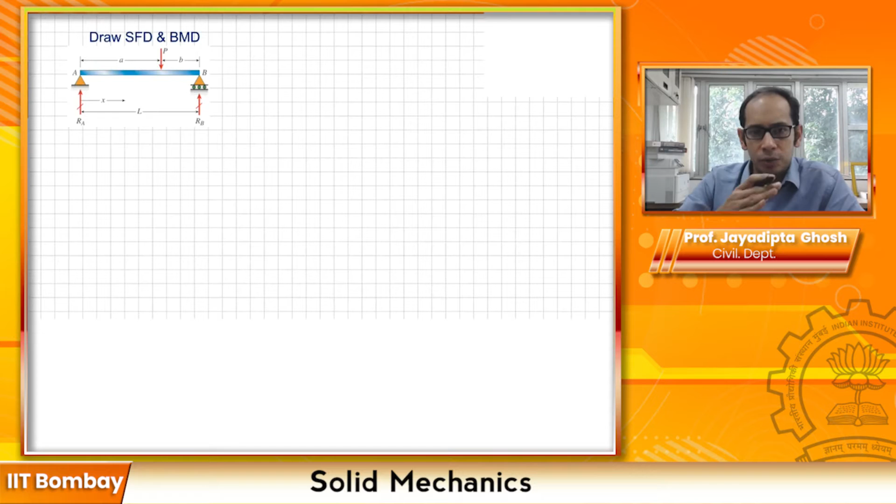Now we are going to go ahead and solve several different problems on bending moment diagrams and shear force diagrams, and we'll travel through some very easy problems to some more complicated ones so that you have a gradual progression in learning to draw these diagrams for the different types of beams, for the different types of loadings.

Now what I highly recommend for you is to go and grab a notebook and a pen, and for the first few examples just draw along as we solve these problems during the lectures. For the later problems maybe you can take a look at the problem, try to solve it on your own, and if you're stuck somewhere or if the final diagram does not match the solution, then come and take a look at the videos. So let's go ahead and dive in for the first problem.

So this problem right here shows you a simply supported beam. This is the easiest problem that you can start with for a first course on drawing bending moment diagrams and shear force diagrams. You have a simply supported beam supported at A, a pin support at A, and a roller support at B, and you have a load P which is acting at a distance A over here.

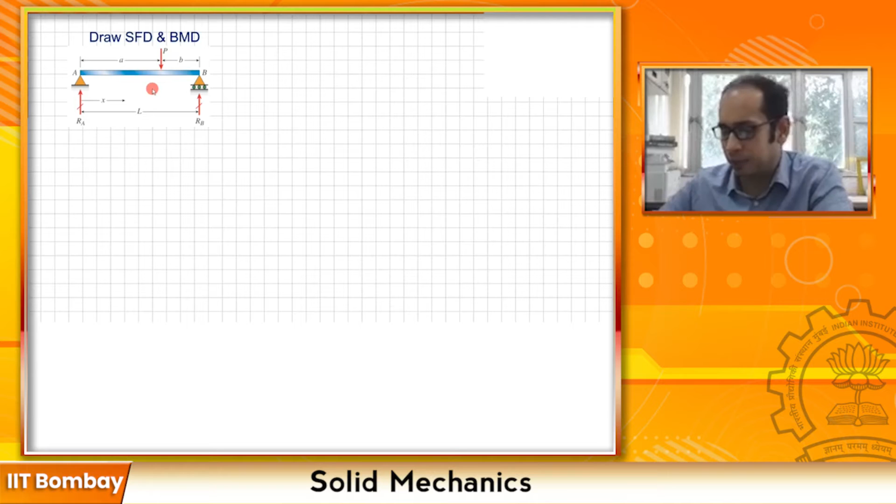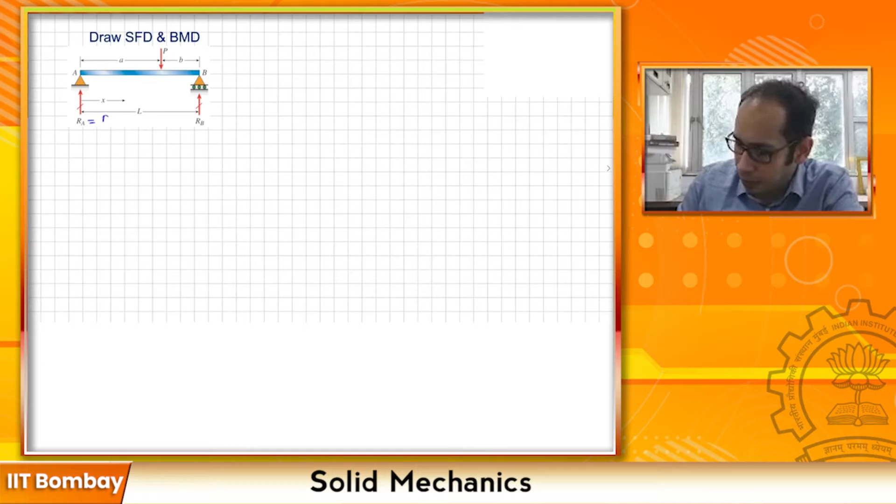Now for this one we have to draw a shear force diagram and bending moment diagram, and before we do that, of course, we have to first find what the reactions are. I'm not going to go ahead and solve and calculate, but you can easily tell that for this particular case, the reaction at A, RA, is going to be P times B by L, and RB is going to be P times A divided by L.

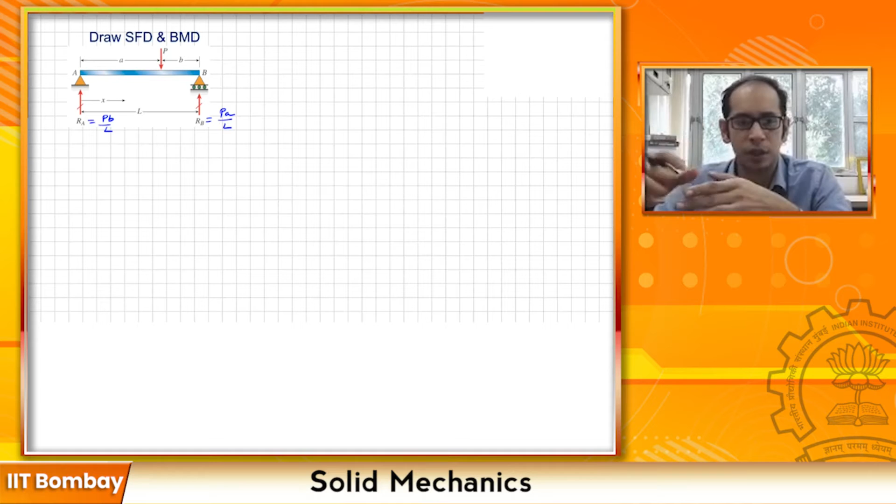Now once you have the reactions, you essentially know the whole system. You know the loads which are acting and what reactions are happening, and those are important precursors before you draw the shear force and the bending moment diagram. Without them it is not possible to draw, because then you will not know how the forces are changing along the length of the beam.

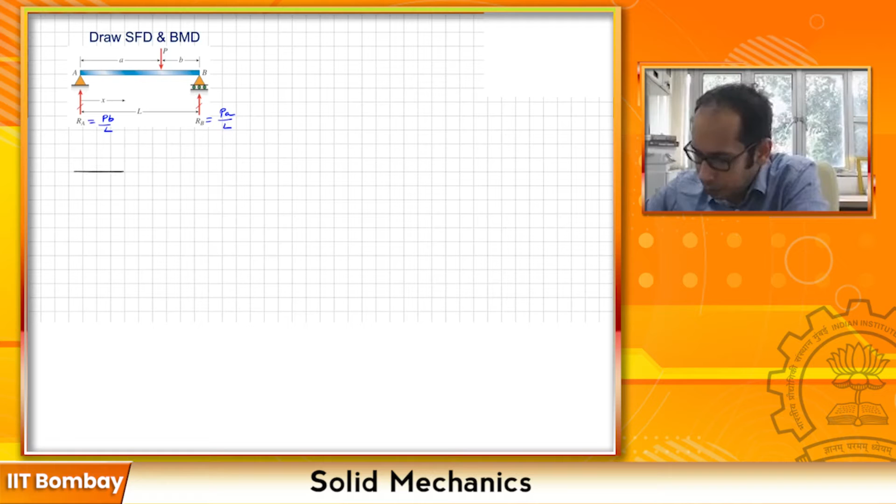So to draw the shear force diagram and the bending moment diagram, I'm going to draw the same beam twice, one for the shear force and one for the bending moment. Let me go ahead and draw that. This is the same beam. I'm going to use this one for the shear force diagram, and I'm going to use this other one for the bending moment diagram.

Now if you take a look at this beam, typically where do you take these sections to find the internal shear forces and internal bending moments? Remember from our previous discussions that you usually take these sections wherever you have points of discontinuities. So here you have a point load at the very end, you have another point load here, another point load here. So in between these point loads are the ideal places to take your section.

So the first section you may be taking around here, and the second section may be here. Let me just mark them. This is 1 and say this is 2 over here.

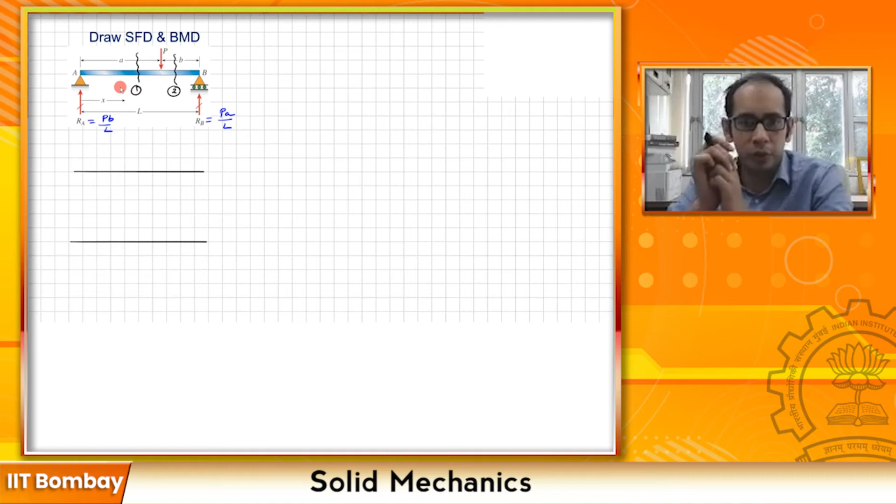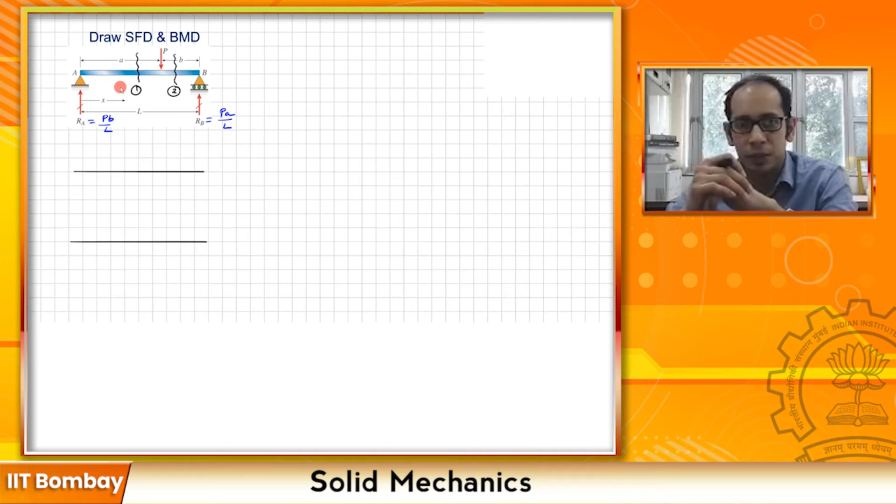So now what we are going to do is take these individual sections and find the internal shear force and internal bending moment acting over there. Remember that you can take these cut sections either from left to right or right to left, up to you, and it's often a matter of convenience that sometimes your calculations get heavily simplified depending on which way you cut. But here let's start by taking from left to right and see where we end up.

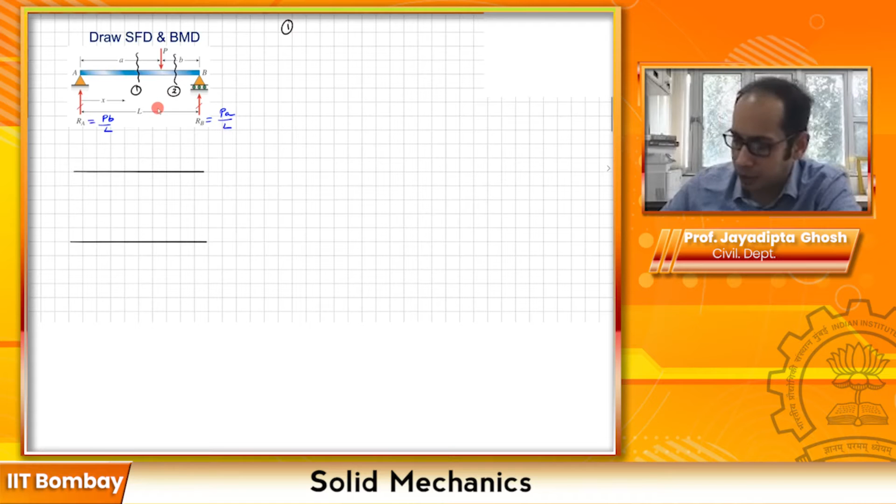So for section 1, let's write the expressions we get on the free body diagram. Section 1 means that x lies between A and this point, let's call this point C. So x lies between point A and point C. Let's write that x goes from A to C, and now let's draw the beam.

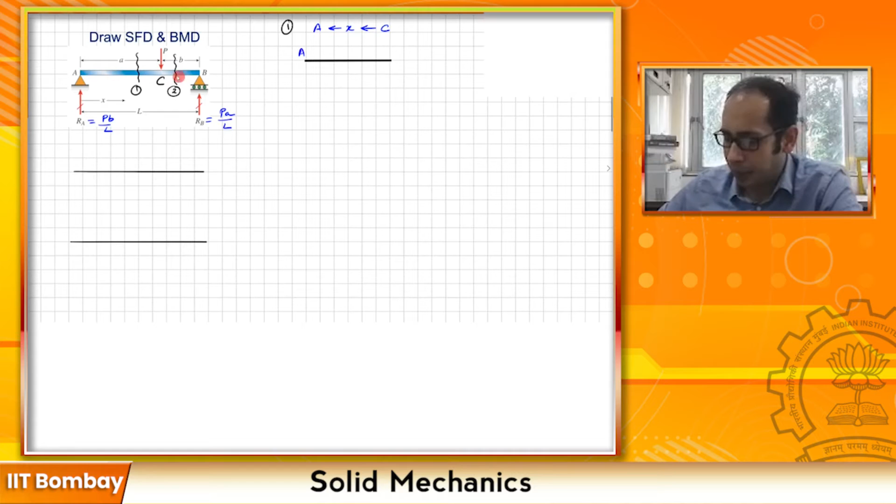In the beam, this is my point A. I'm going from the left part of the beam to the right part. From A, I have the reaction which is still there, PB over L. From this reaction to where I've cut this section, just right of A and left of C, I don't have any other loads, so I'm not going to draw anything on top of the beam. But at the very end, I'm going to mark my internal shear force and internal bending moment.

Since I am going from left to right, my positive convention on the nature of action for shear and bending is that my shear tries to rotate my beam in a clockwise manner. So my positive direction for shear is this V over here, and the positive direction for the moment is the one which tries to bend your beam into a trough, causing a sagging effect. So this is my positive M.

Now if I solve the equilibrium equation for this cut section, this is in equilibrium because the whole beam is in equilibrium. So if I write the equilibrium equation for V, I get V minus PB by L equals to 0, which means V equals to P times B divided by L.

Second expression for moment: if I take the moment of the forces about here, remember this distance is x because x is between A to C, so let's mark that as x over here. So for the moment, taking the moment of the forces about this particular point, I have M

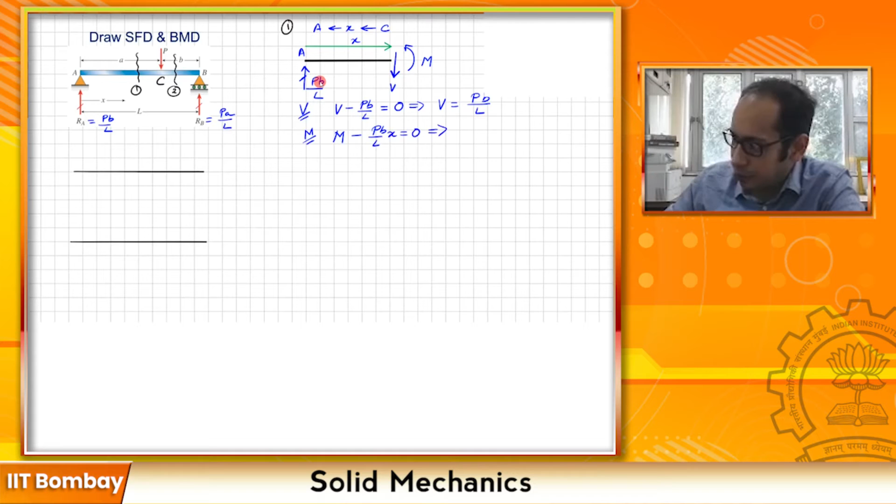minus the moment due to this force, PB by L times x, equals to 0. That gives you your bending moment as PBX divided by L. This force will not have a moment because I'm taking the moment at that point. So this is for section 1, from A to C.

Now let's write similar expressions for section 2. You might wonder whether it's easier to take from left to right or right to left, but for this problem, just to be consistent and show we end up at the same thing, let's draw from left to right. Now for section 2, x lies between C to B.

So in this case, your x lies between C to B. If I draw the free body diagram of the beam, let me draw a continuous line again. Suppose this is my beam, going from the left end all the way to the right end. At A, I will have the same reaction that I had, PB by L.

In between, remember x is from C to B, so I have to cross this P somewhere at point C. Let's mark that point where you have a vertically downward acting load of P, and nothing after that. So I'm going to mark my shear and the moment. Again, since I'm going from left to right, my positive convention for shear is acting vertically down, and this is my moment which turns my beam into a trough or makes my beam smile.

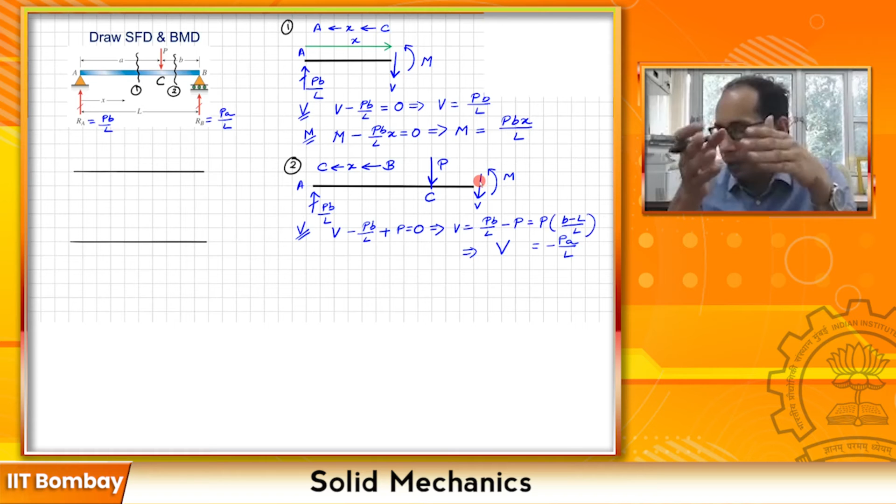So this is going to be equal to minus PA divided by L. So V equals to minus PA divided by L. Remember that when we mark this shear and moment, we are marking as per our positive convention: the shear rotates the element clockwise, and the moment M makes your beam into a trough. The problem will tell you whether your convention was in the right sense or not.

If you're getting a positive V, it means that yes, V indeed is acting there in the positive downward way as you have marked. Or if it is negative, it tells you that no, at that point V acts in the opposite direction. But it's fine, as long as we are marking it properly in the diagram.

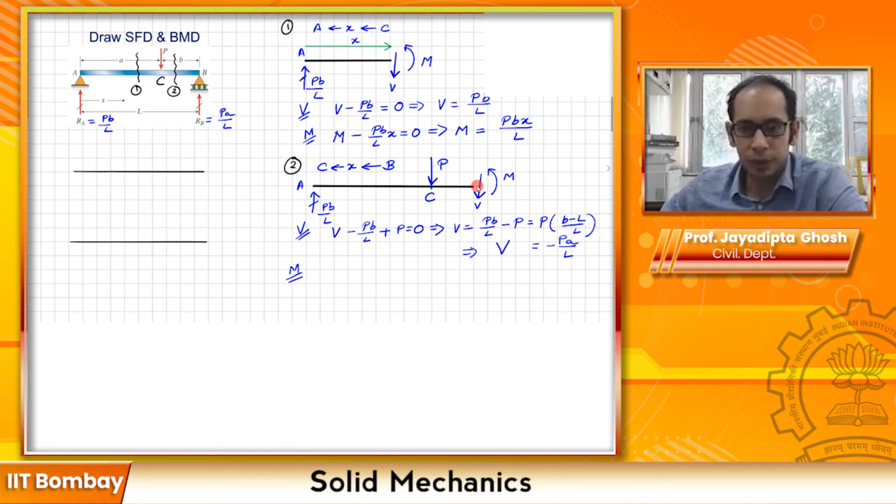So we have calculated the expressions for the shear. Let's write the expression for the bending moment now, again taking moment of the forces about this particular point. I have M and I have this force here. Remember, this distance is x, because I'm taking x all the way from left to the right. Let's mark this one.

This is x over here. Also remember, this P acts at a distance a over here, so let's mark that as well. This is a, this distance is a. So I'm writing the expression for the moment. This is M, right? And the moment due to this particular force is going to be minus

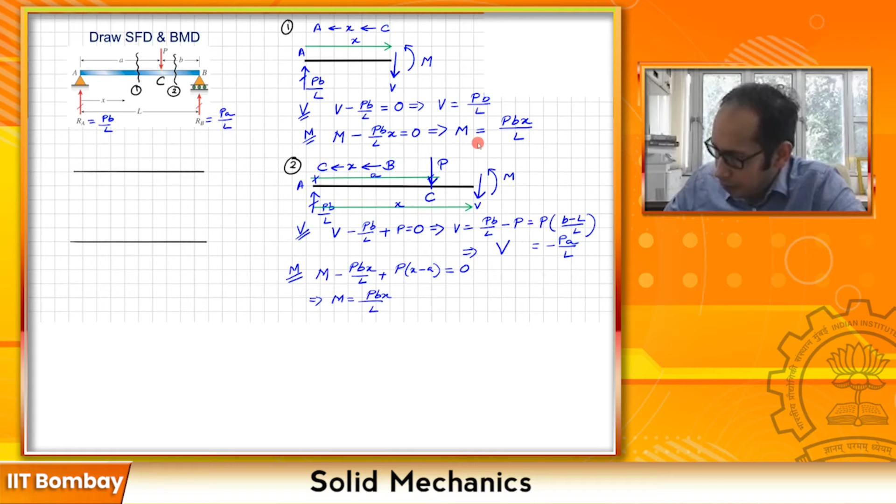PBx by L. Then I have to account for the moment for this force. This acts in the same direction as the moment M is acting, so it is going to be positive. It is plus P into x minus a, equals to 0 over here. And if you simplify a bit further, what you get is that M equals PBx by L minus Px plus PA.

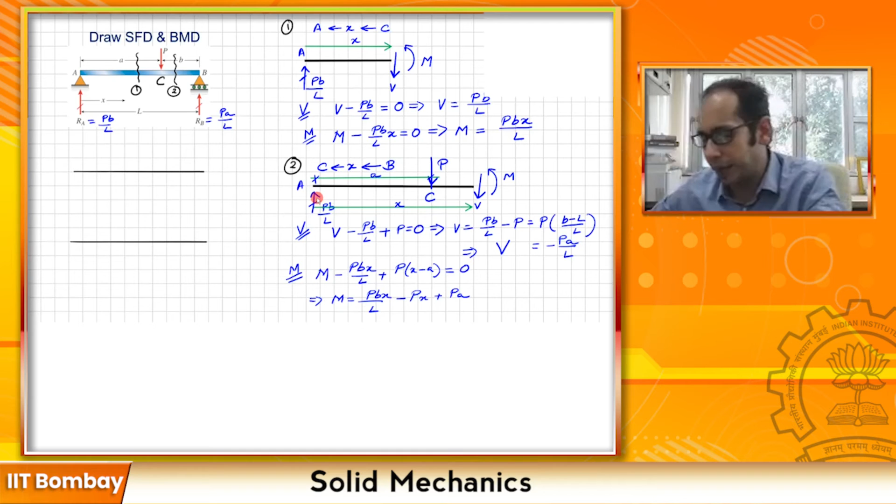Okay, so now that we have these expressions for section 1, the shear and bending, and for section 2, the shear and bending, let's try to draw them in this diagram. It's often easy when drawing diagrams to have parallel grid lines, so that you know where the discontinuities are. Let's go ahead and do that.

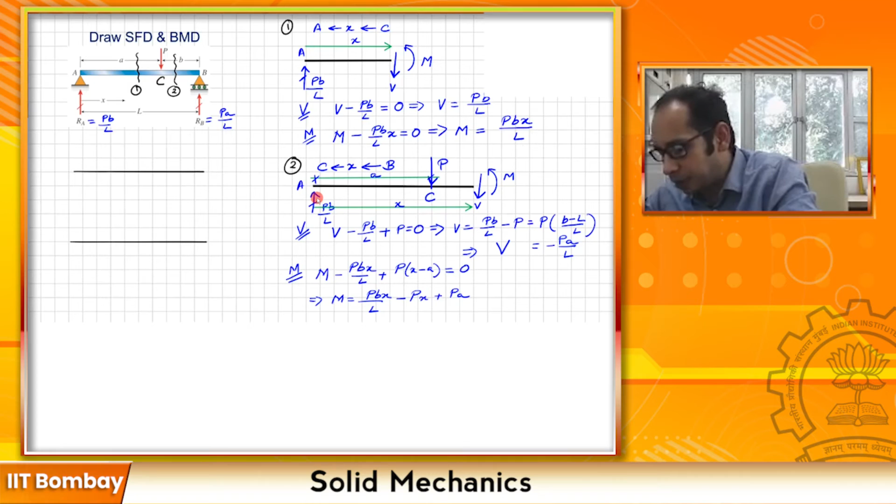By parallel grid lines, I mean where this section A is, I'll drop a line here, and where this P is, I'll drop another line here. Where this reaction B is, where this support B is, I'll drop another line here. So this is my beam. This is my point A over here, this is my point B over here, and intermediate I have my point C. And similarly at the bottom, A, then C, and this is my B at this point. These are the points.

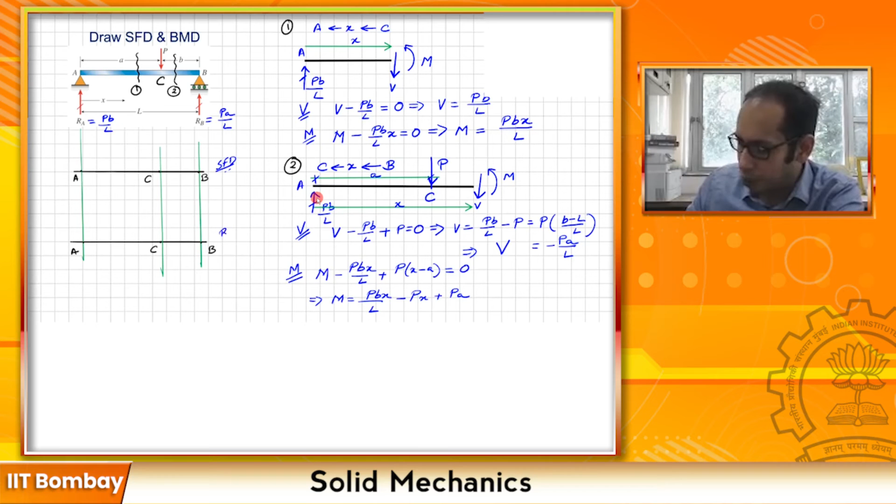Now from A to C, the first one is my shear force diagram, and in the next one I'm going to draw my bending moment diagram. For the shear force diagram, you have to consider the V's. As you can tell, when x is from A to C, the value of V is a constant PB by L, which is quite intuitive. If you come to the left end, you see there is a vertical reaction PB by L, which automatically bumps up your shear, evident from this expression as well.

So at A, I am going to have vertical shear, that is PB by L. It is positive. This comes out as positive, and in this diagram the upper half plane is positive and the bottom half plane is negative, both for the shear and the bending. Since it's PB by L, I've drawn it in the upper half. Now, interestingly, from A to C, there is no change in shear because it is independent of x, so it's going to have a constant value.

Now, interestingly, just after you cross point C, remember this is probably valid when you're just to the left of C, because here you have this discontinuity of P acting. So when you're just to the right of C, in this region, the value of V drops to minus PA divided by L. So it becomes negative over here.

So that means you are going on a constant line PB by L, and all of a sudden, just after you've crossed point C where this load is acting, you drop to minus PA by L. Let's mark that drop as well. So we are essentially having a drop, this is PA by L. I'm not writing the negative sign because I'm drawing in the lower half plane, which is negative to begin with.

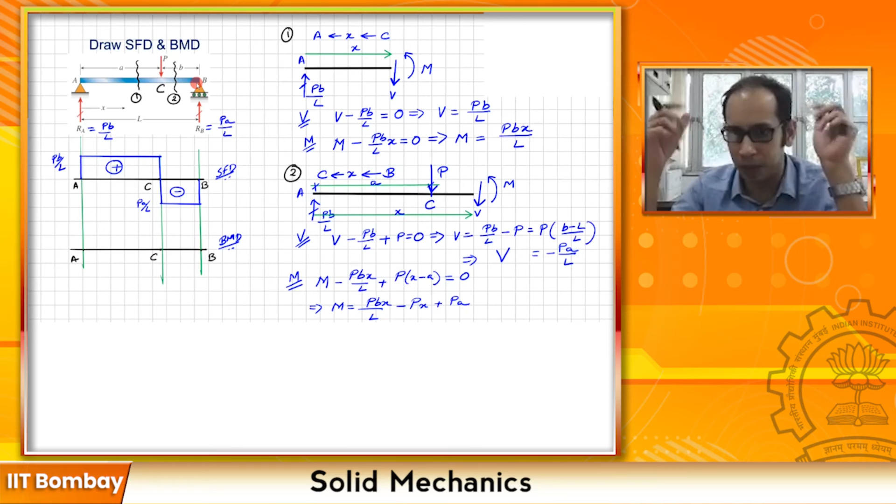Now let's go ahead and mark the bending moment diagram. Intuitively, remember this is a pin and this is a roller at the two ends of the beam where there is no externally applied moment. So the bending moment at points A and B at the two ends of the beam must be equal to 0. Let's see if that is the case.

From A to C, M becomes PBX divided by L. So when X is 0, that is at A, you have a 0 bending moment. And when X equals A, that is just to the left of C, the value of M becomes equal to PAB divided by L.

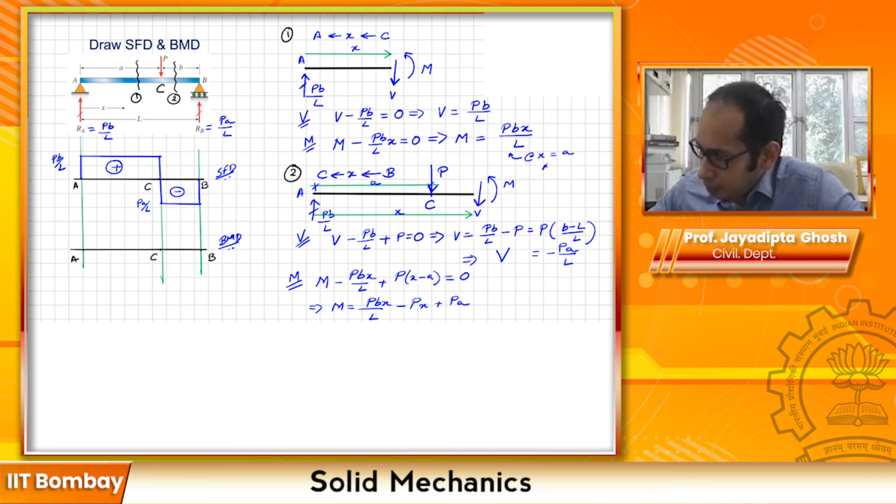Let's mark it: at X equals A, the moment is PAB by L. And how is the variation? This is a linear function of X, so it goes from 0 over here to PAB divided by L. So this is what I get, this point here is PAB divided by L.

Right after this point, just crossing point C, the expression for the moment changes. Intuitively at B it should drop down to 0 because at B we have a roller. Let's check by putting X equals L, remembering X goes from C to B here.

At X equals L, this L and this L cancel, so I get M equals PB minus PL plus PA. Taking the first term and the last term, this becomes PA plus PB minus PL. Now A plus B is nothing but the total length L, so PL minus PL becomes equal to 0. So it checks out.

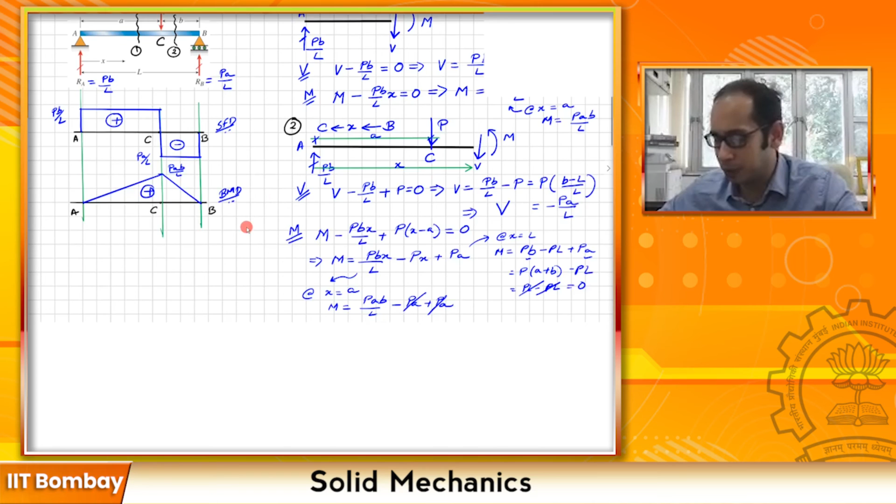Now, a few key takeaways: can you guess the point where the bending moment becomes maximum? As you can tell, the bending moment becomes maximum over here. And how does the shear translate there? At that particular point the shear goes from positive to negative, so there is a transition.

We will discuss more on these intuitive correlations between the shear force diagram and the bending moment diagram later, when we learn some relationships between these types of forces. But I hope this first simple example is clear, so after seeing this, maybe you want to try it out on your own.

Now, this problem, as I said, we did by taking the section from the left to the right. If I was taking the sections from right to left, my V convention would change, but you will see we end up with the exact same expression. So let's take a look at that as well.

Right, so now we are going to take the same sections 1 and 2. Instead of taking from the left to the right, let's try to take from right to the left, and let's see if we get the same shear force and the same bending moment diagram or not. You should, right? But this is just to prove that you actually get it. So maybe we just do it for this section, and the other one you can compute, and you will see you will end up with the same shear force diagram and the bending moment diagram.

So let's talk about this particular section 2. When we write the expression for section 2, remember, since I am going from my right to the left, my x is going from B to C. So x lies between B and C over here.

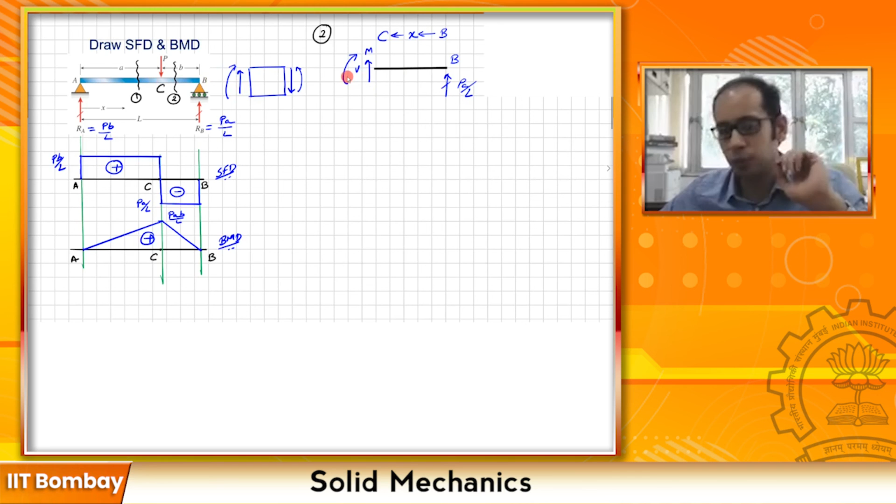Always remember that small element we had looked at previously - if you are going from left to right, the positive convention is this, and if I'm going from right to left, my positive convention is this. So here, since I'm going from B to the left, this becomes my positive convention for the shear. The best way to remember that: the nature of action, V tries to rotate your element clockwise, and M tries to bend your beam into a trough.

So here, if you again write out the expressions for V and M, what do we get? For V, I get V plus PA by L equals to 0, which gives me V as minus PA by L. Does it check out with what we had done before? Yes, it does. When x is between B and C, the value of V was minus PA divided by L. So it did not matter whether you took this section from the left to the right or you went from right to the left, you must end up with the same quantity. So you are getting the same quantity over here.

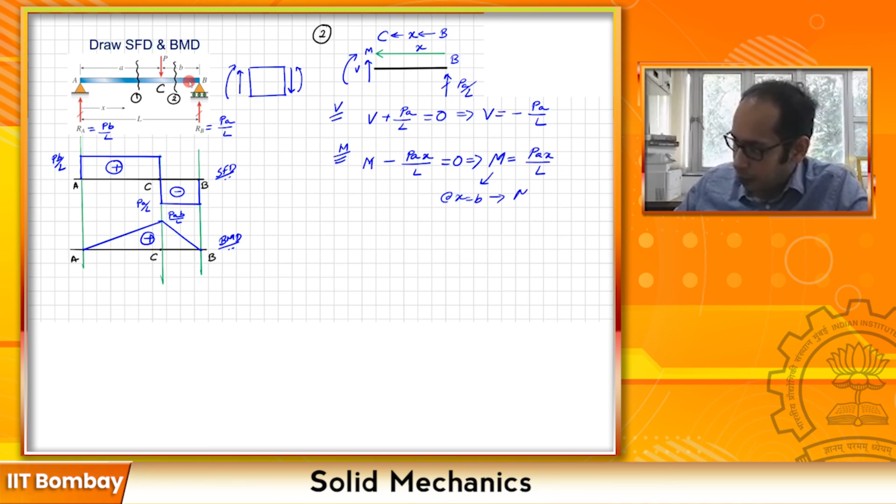Let's write the expression for the moment. Now remember here, my x goes from here to here, so this is my x. Now, if I take the moment of the forces about this particular point, I can write that M minus PAX divided by L equals to 0, which gives the moment M as equals to PAX by L. Again, look that when you put x equals to B, this distance over here, your moment becomes equals to PAB by L, which is exactly what you had over here. You get a positive PAB divided by L at a distance B.

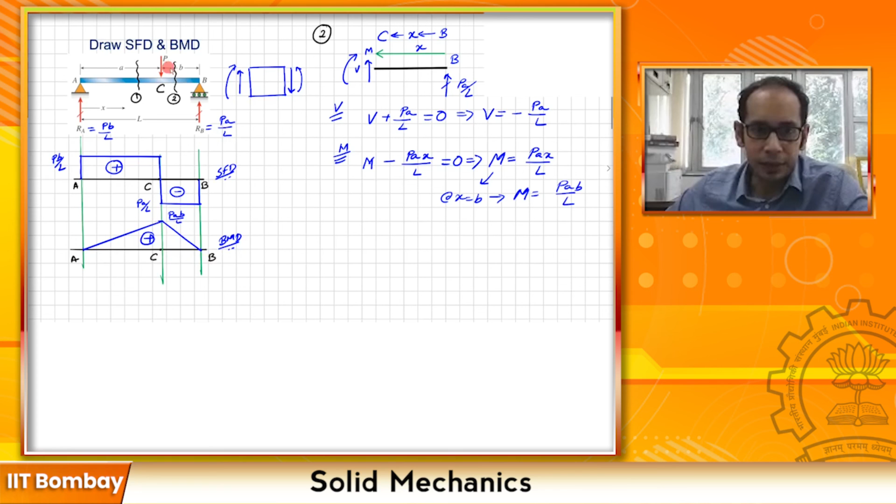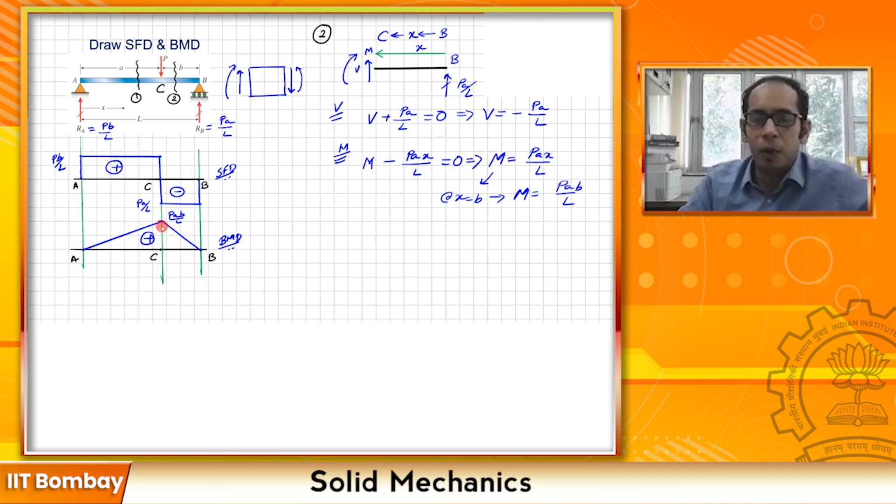Now similarly, if you go ahead and write the expressions for 1, you will see that you will again start falling back into this shear force. So try it out - instead of going from left to right as we did previously, go from right to left. We already wrote for 2, write for 1, and you will see that you will end up with the same shear force diagram and the same bending moment diagram as well. Okay, so this concludes our problem example number 1. Next we'll look at example number 2.